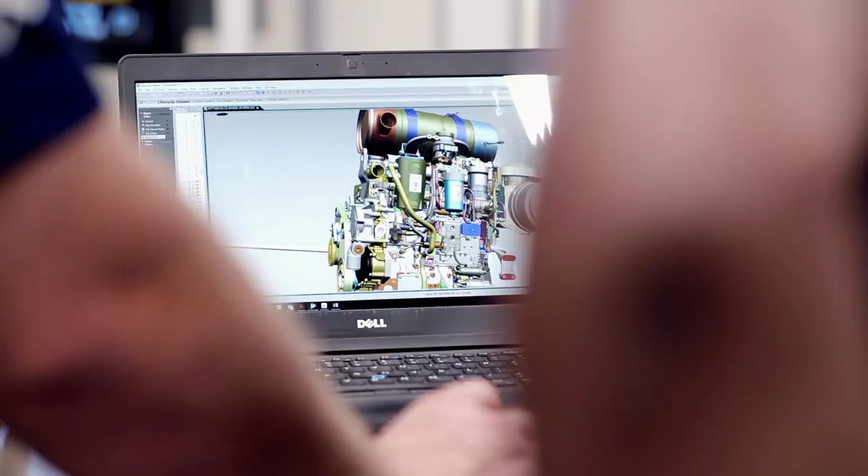When customers come to us who've experienced problems with other engine suppliers, we know all the science behind it and we're able to explain why they hit problems, what countermeasures can be made, and help to protect their products going forward to be able to operate in the very worst climatic conditions.

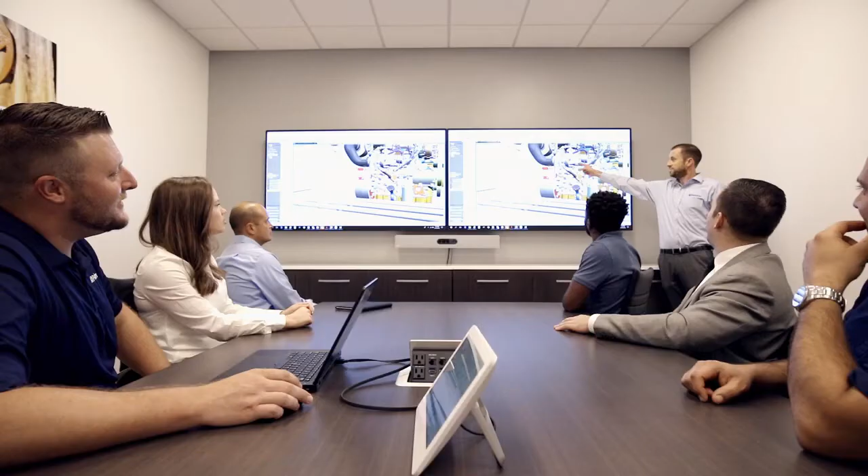We start with the customer and we listen to exactly what they need out of our products. And then really our approach here is to take that and through a series of time-tested processes, turn that into requirements that we then develop the product against and prove that it meets in every condition, in every aspect, before we then put it in production.

We do all the concepting work with the customers. We go through to make sure we understand both the altitude requirement, the ambient temperature requirements, what the customers need for load response, all those kind of things. Once we get all that defined, then we'll walk into the design space where we start specifying an engine specifically that will meet all those requirements.

Once we've gathered that information and we've characterized those interactions, then that's fed into our technical objectives document, which is a very large database of objectives for the entire engine system, and they set targets for component designers, for system designers that they have to go and achieve so that we can meet our customer requirements.

There are process partners that we've selected through the development of this program to, as we're designing the engine, put in front of the customer, test it. What do you think about this? Is this really what you're asking for? Does this work for you? How can we change it, make it better? So it's a very collaborative process with those process partners.

So as we initially begin to lay out engine designs and look at how we are going to configure the engine, one of the things that we do are virtual engine installations into literally hundreds of different types of machines. Every machine is a bit different. Every machine has slightly different needs. And what we look to ensure is that we can offer a product that's going to meet those needs across a range of engines.

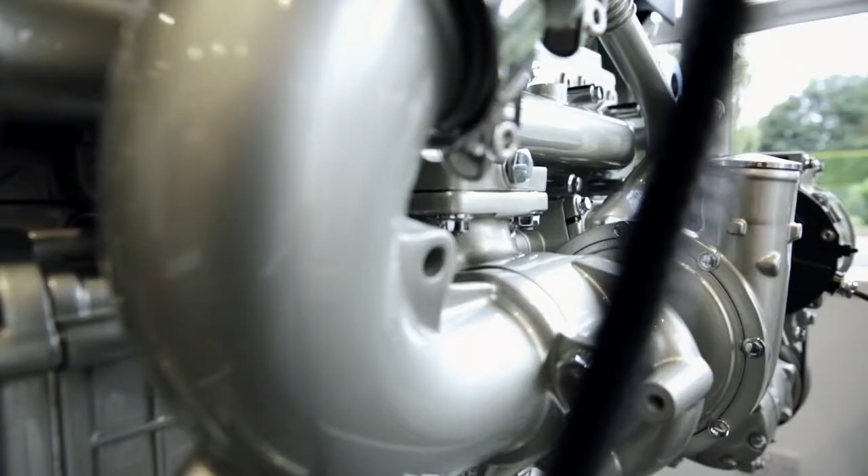With the diverse range of applications that our products go into, we really understand a lot of those applications and understand the risks associated with the different ways you can run the engines, how that can implicate how we calibrate them so that we get good in-use emissions, but also massive reliability, considering uptime, productivity, all of those things that are really, really important.

We put a lot of focus on this in our development programs, and we look at that through some of the concept simulation tools through to getting prototype engines in the iron. We have quite rigorous processes that allow us to develop those designs, have very in-depth analysis capability, so that even before we cut metal, we have a good level of confidence the design's going to work and deliver what we want.

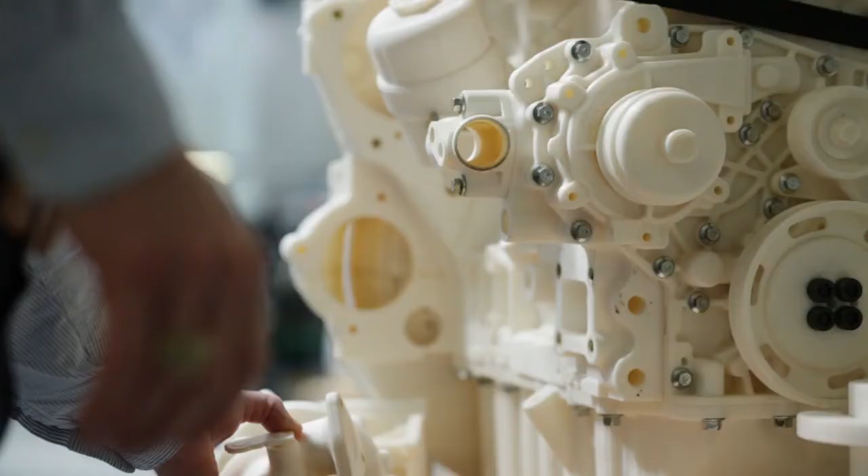So we're always looking to incorporate new technologies and new ways of doing things to improve how we develop the product here at Perkins. One example of that would be 3D printing, from our designs to actually touch and feel what that component or that part might look like. The benefit of that really was so that we could fast track all the other downstream processes before the engine had actually been built.

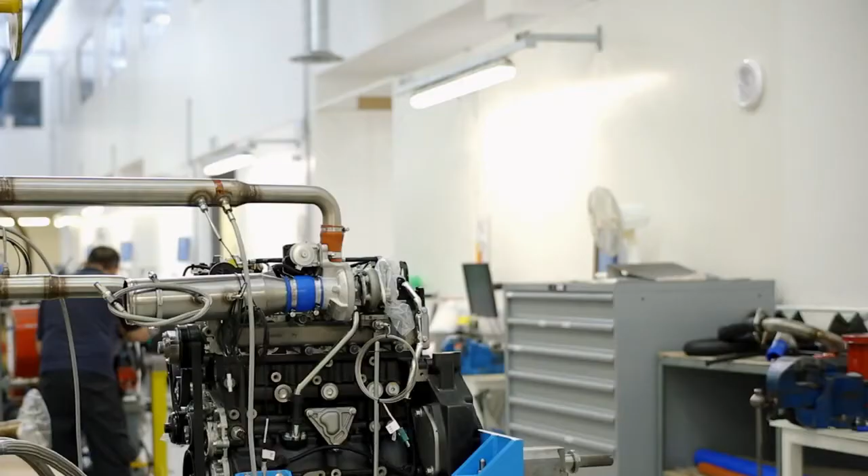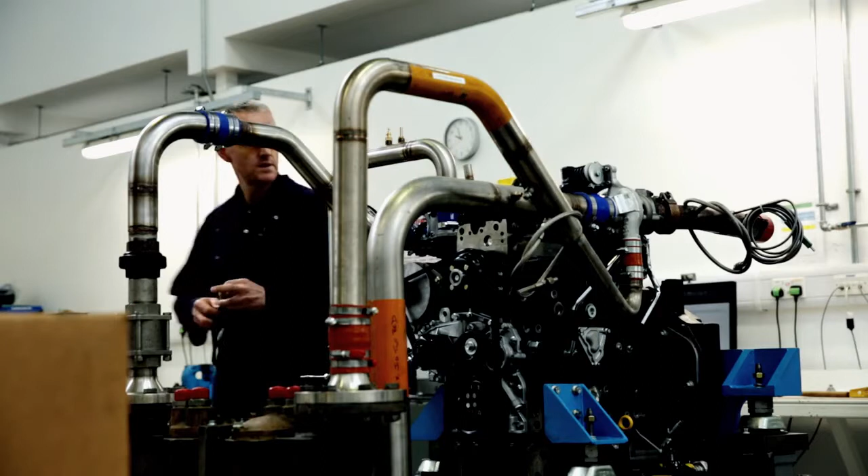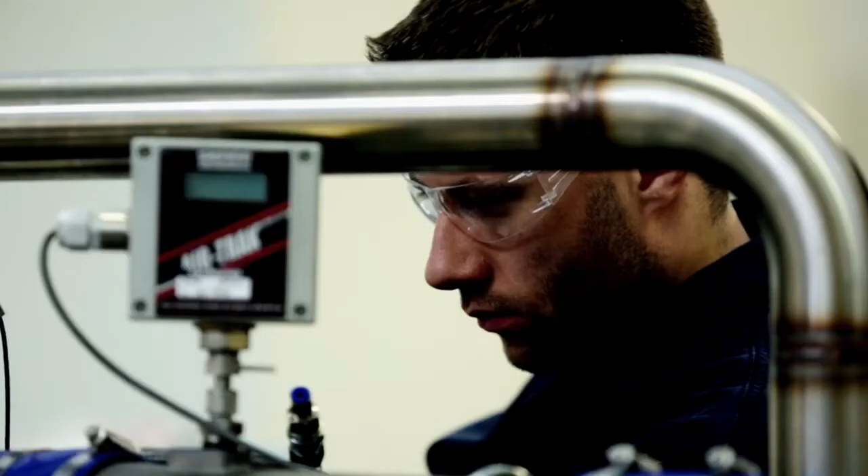Every one of the first engines that we develop is hand built by a set of master technicians. Those engines are measured in hundreds of different ways as we put them together. We measure everything from the minute details of the combustion geometry in the pistons and the piston bowls themselves, to how the valves, the camshafts, all the moving parts of the engine work together. All of that is completely blueprinted. So as we put those very first engines together, we know exactly what performance specification they're built to.

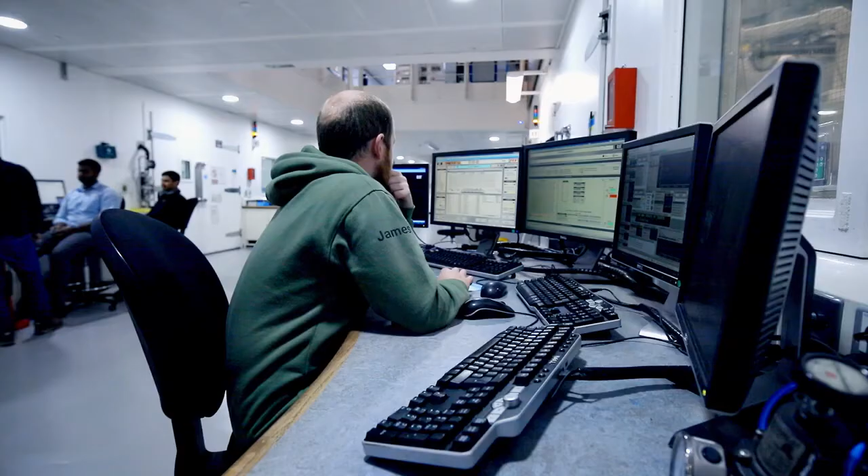And that's very important to us as we look at the results when we start to actually test and develop these products. Knowing the pedigree, knowing exactly what that engine was when it started life is absolutely critical to making sure that we know how it ends life when its validation is complete.

I like the creativity of design. Being a design architect, right at the start of the program, when you're laying down ideas, and then 2 years down the line, you see the design engineers have turned those concepts into reality. You see it in the factory on the production line later on, and all of that is very rewarding to see. It's very satisfying to see something that you designed, that you had in your head, designed in CAD, simulated, analyzed, tested, put together, made, and to be able to touch it and run it and see how it performed.

It's very satisfying. Another way that we think about the job we do here is that in some ways we actually play the role of the first customer, the customer before the real customer. Part of our job is to make sure that the engines we put out of development are good enough that we would buy them ourselves, that they're good enough that we would recommend them to our father, to our brother, to our mother, if their businesses were dependent on this product. So in a lot of ways, the way we think about that is thinking about ourselves as the first customer, and is the engine good enough?